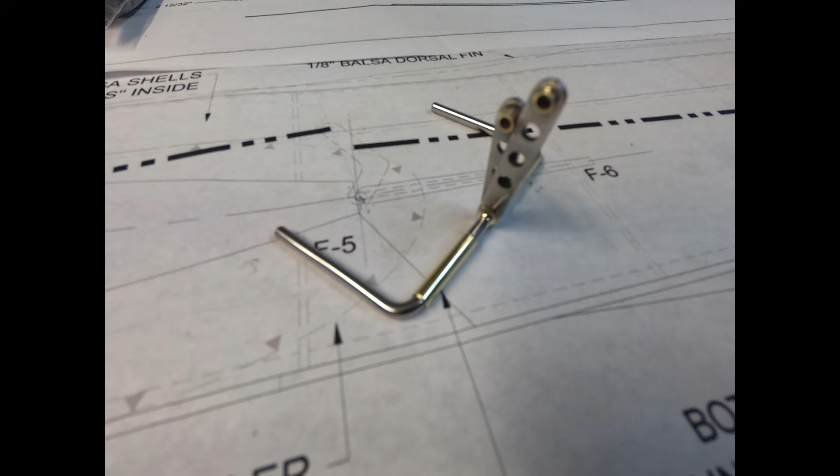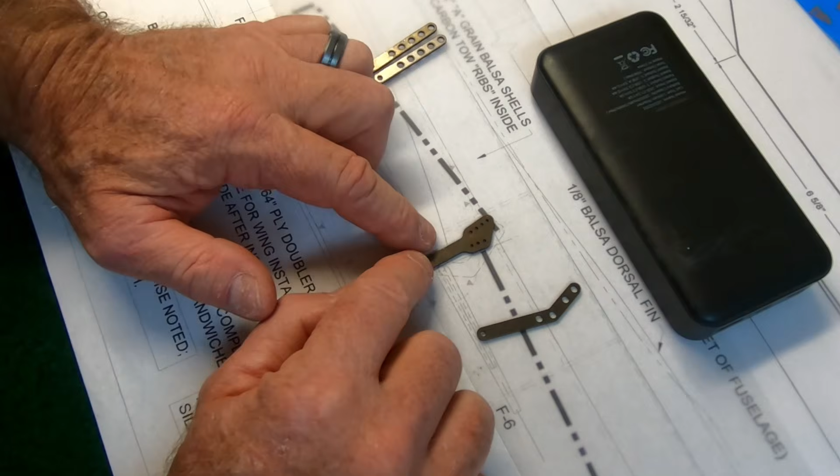So what I'm going to cover is how to custom make a horn out of two tabs if you don't have these dog-legged tabs. So the idea behind these type of horns is the offset. And what I mean by offset is the angle. So what they're trying to do in this concept, they're trying to actually keep this push rod to the axis of the flap horn

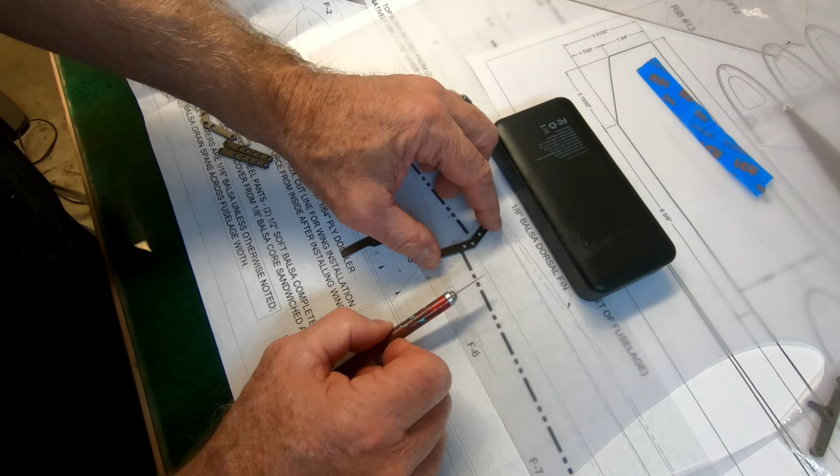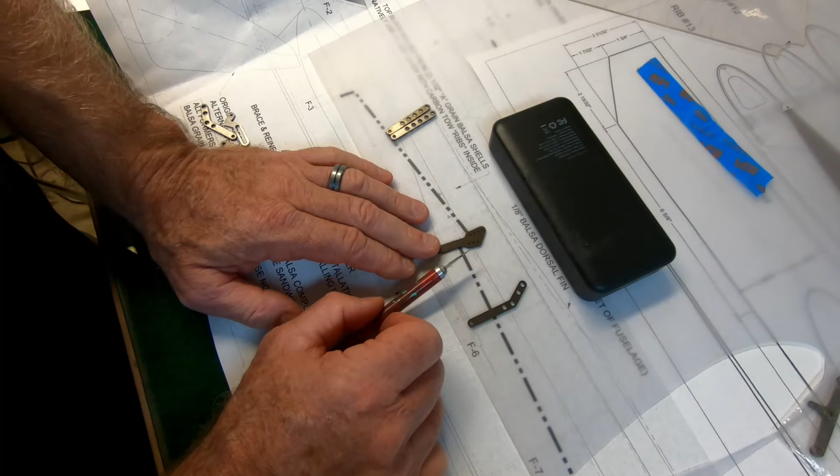vertical at 90 degrees. So if you're coming off the bell crank at this angle, you want the flap horn to angle forward like this. And then of course if you're over here going to the elevator, on some configurations you might want it to angle backwards. So all this geometry depends on your airplane. So let's just say you get into a scenario that this won't work and this won't work. So you want to custom make your own.

Bob Hunt and I talked about the G10 board horns, and those are coming. There's a couple things I got to finalize. It's not so much how to make them, it's the tooling. This is one option out of many. There's not one solution, there's many. So this is just an option.

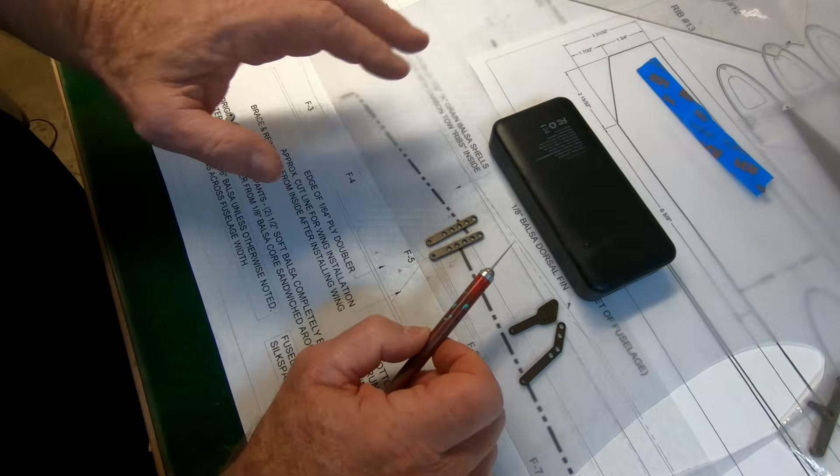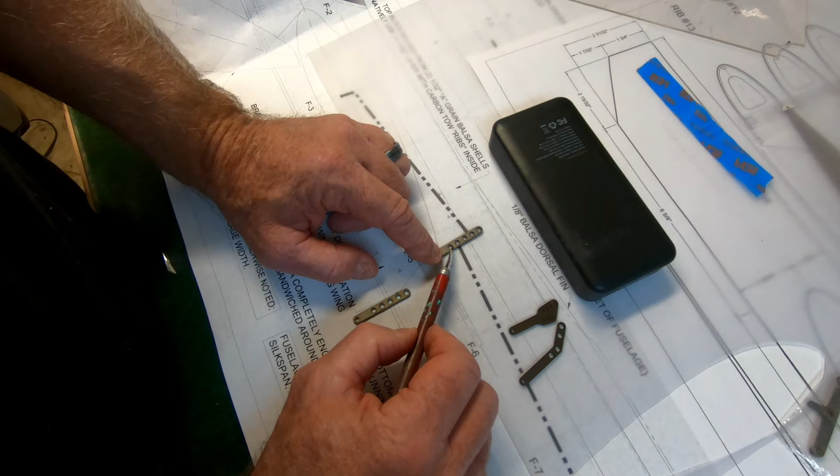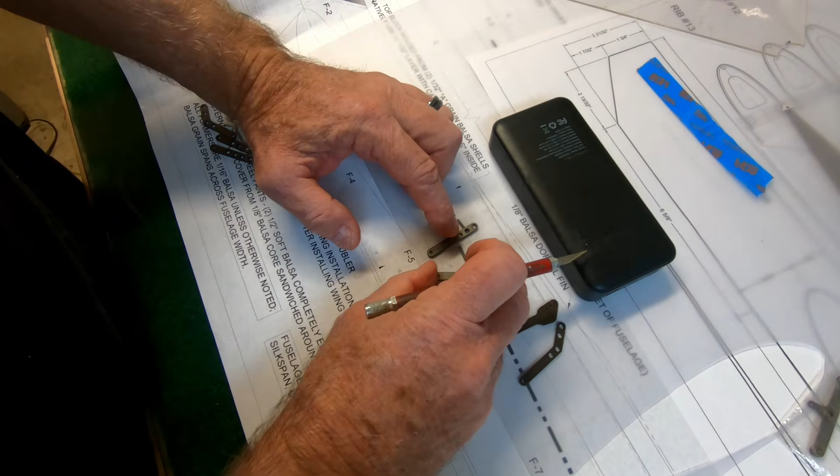But in order to go with this option I'm about ready to show you, you got to be able to braze. And then there's other videos where I showed you how to accurately drill holes, within 1/1000th of an inch, and I'll refer to those, or I'll put a link in the description on this video. So the concept is this one needs to lean forward and this part here needs to lean back.

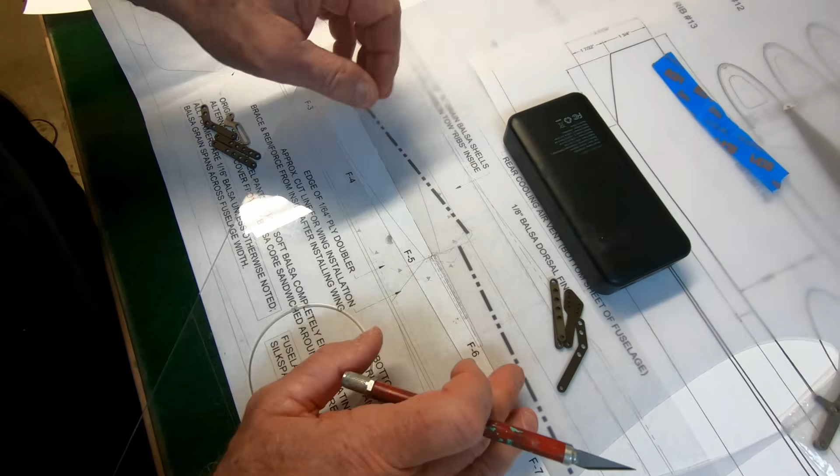Okay, so in order to get there, what I first need to do is line this edge up here with the center line of the wing and the flap. And if it's not already straight on your C-temp, cut a straight edge in your C-temp. What I like to do on a square, and these come in handy for a lot of different things, I'll take another carpenter square and I'll scribe a line right here into the plexiglass.

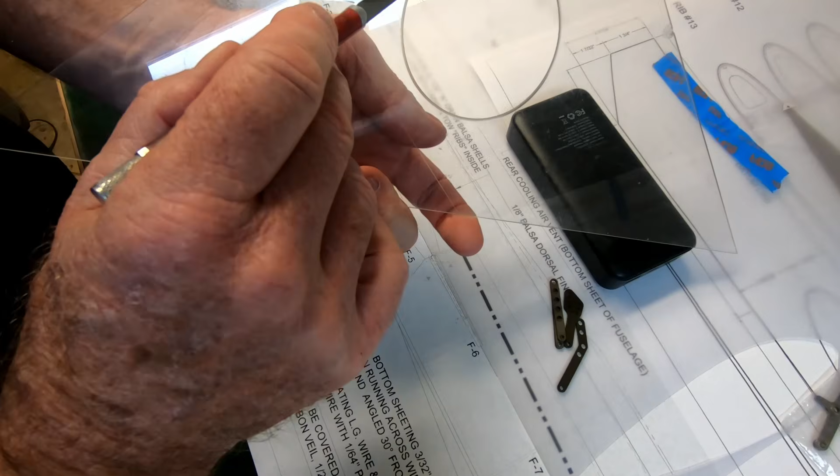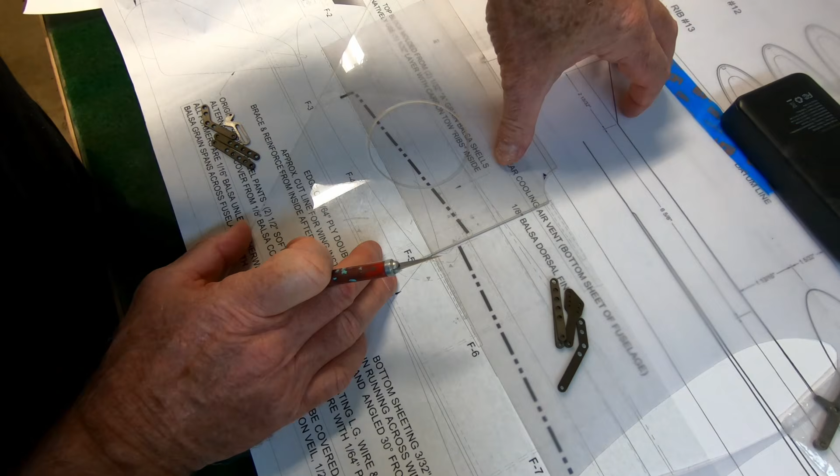And what that allows me to do is lay the plexiglass over the plans like such, and then scribe a 90-degree line to it, or mark it. So what I need to do in this case, I need to mark off 90 degrees to this push rod. So this is my fulcrum point right here,

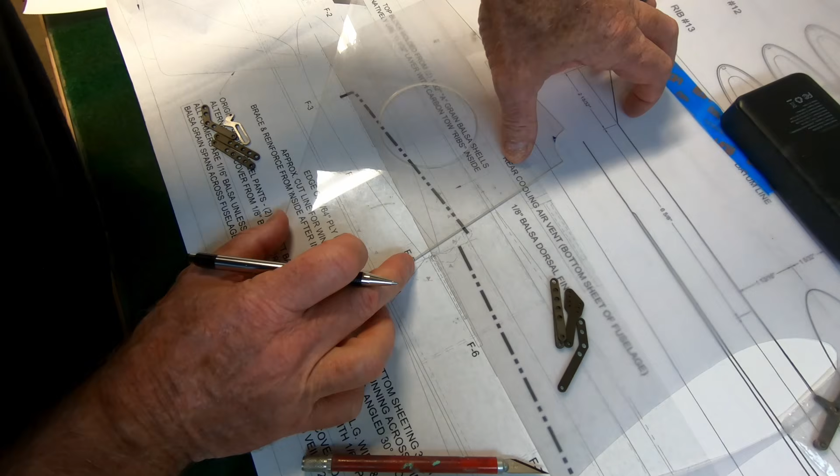and I'll take this scribe line in the plexiglass and I'll line it up to the push rod just like that. So now I know from the push rod coming off the bell crank to the first flap horn, this is the angle I want for 90 degrees. Now if you want anything other than 90, obviously you got to get a protractor in there.

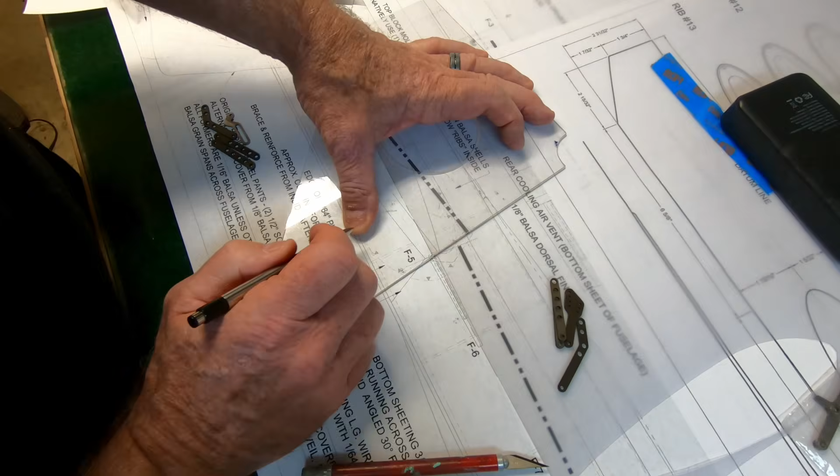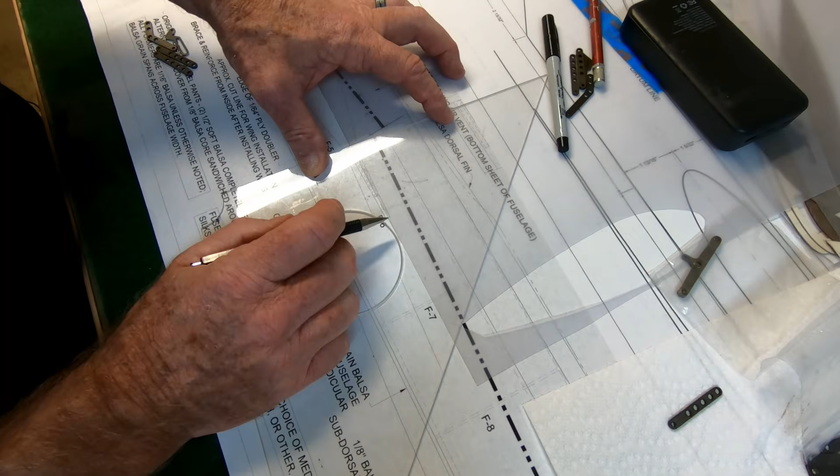So now the next step is to go from the fulcrum point here, and I'll come over here to where this push rod is, and I'm going to flip this over here, and I want 90 degrees from here. Anytime you make an adjustment at your elevator horn back there, it's going to throw this off. But I'm not going to get into the geometry.

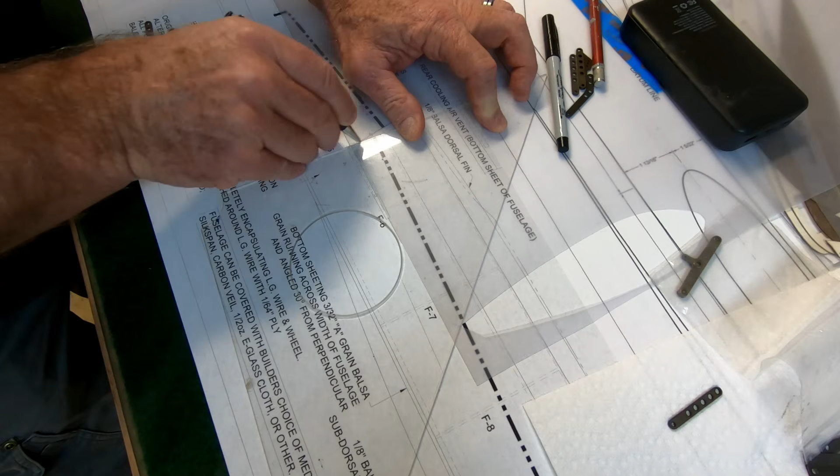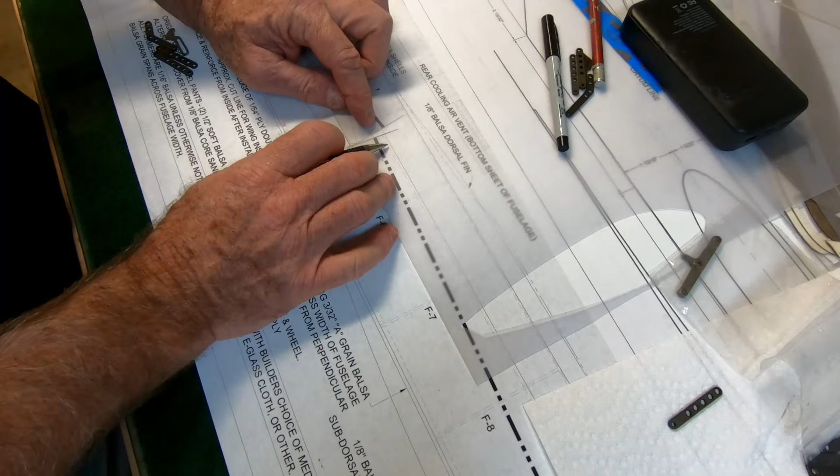There's been so many people come up with some good stuff. It's on Stunt Hanger. Howard Rush put out a video, and Sparky made a standalone video of the program that he came up with to get this geometry. So I'll leave that to the experts. But all I'm trying to do here is show you how to actually make a horn with geometry that's unconventional.

So this is what I need. So you got to remember, right here is, let's just call it the datum line. We'll come off and we're going to braze this horn to your wire at this angle. We're going to braze this horn at this angle. This C-temp is going to be the template to accomplish that.

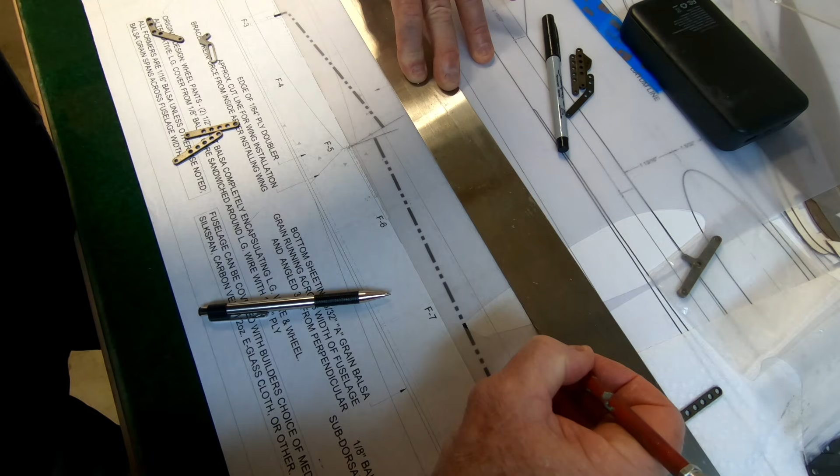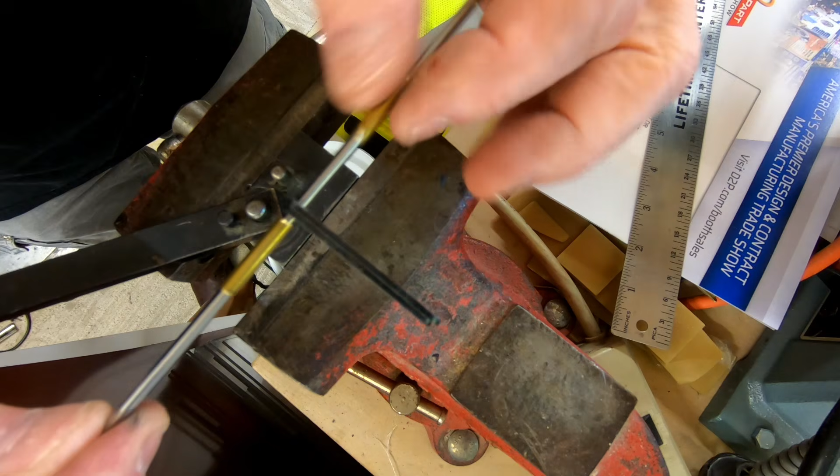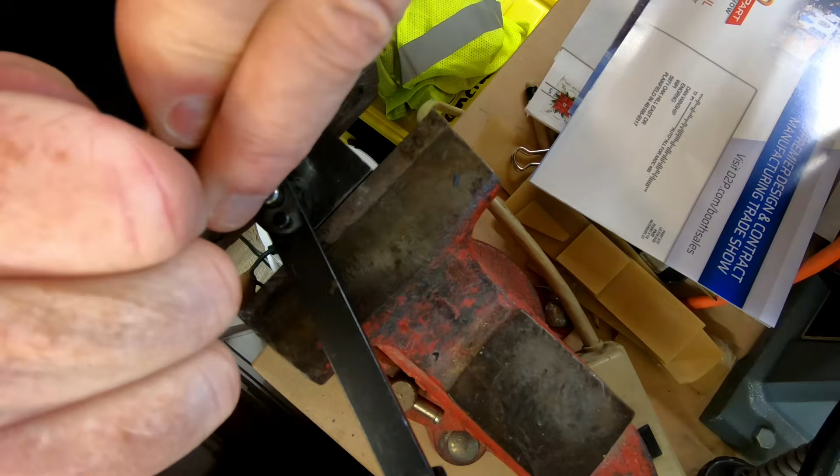And I overshoot it a little bit, and then I spring it back to get the 90. The tricky part, without a jig, is to figure out how much creep is going to come into this, because as you bend this wire around the post, it's going to want to pull this way. It doesn't have to be perfect, but try to get this parallel on the same plane as your bend.

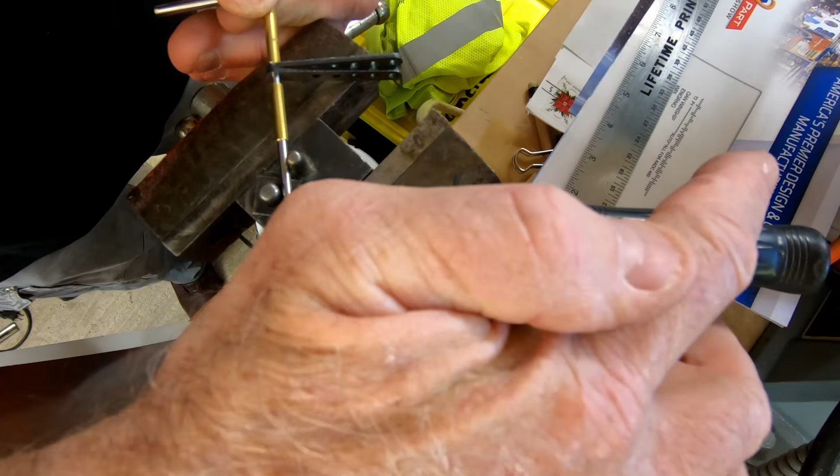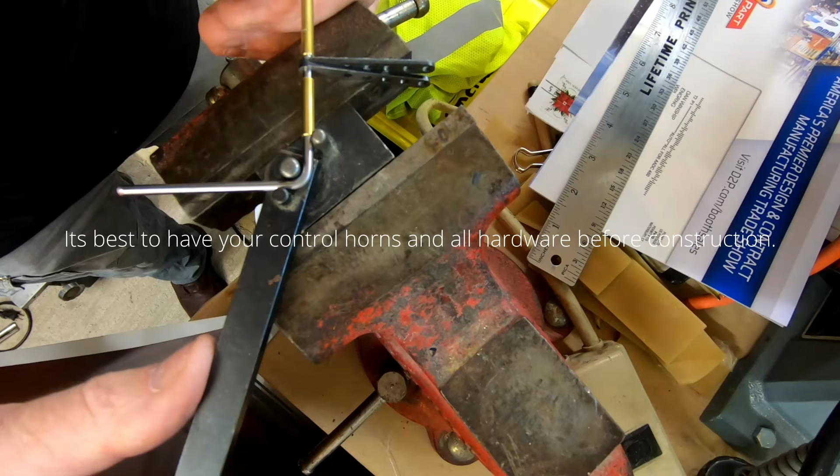Let's tighten this foot vise down a little loose. Let's pull it around here. Now, being drill rod, I get a little tweakability with this wire. You go on the outside diameter, it's 2 3/4, so that's what I wanted. I guess we're looking at a 1/8 inch creep.

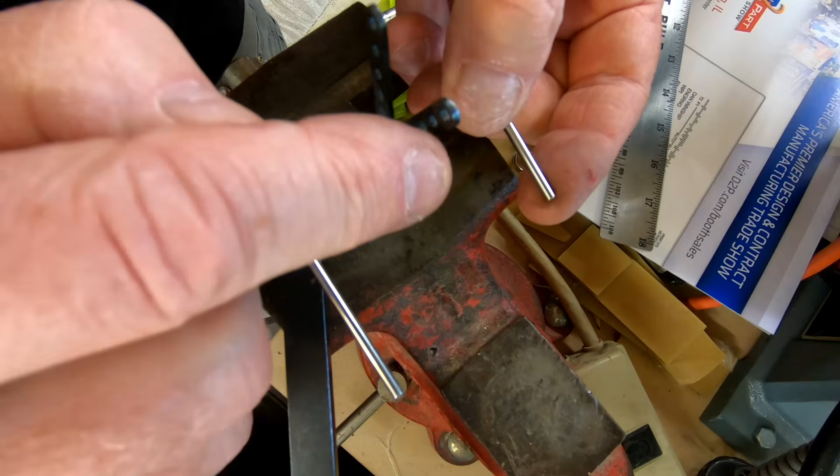And then what we're going to do next is put this in a fixture, and we're going to take the template we made to get the right angle on this flap horn. It's clamped between these two plates. There's a magnet here that holds these 1/8 inch rods, and sliding these rods back and forth on top of the magnet allows me to get the angle I need. And I can just get a visual right here to see if it's the right angle.

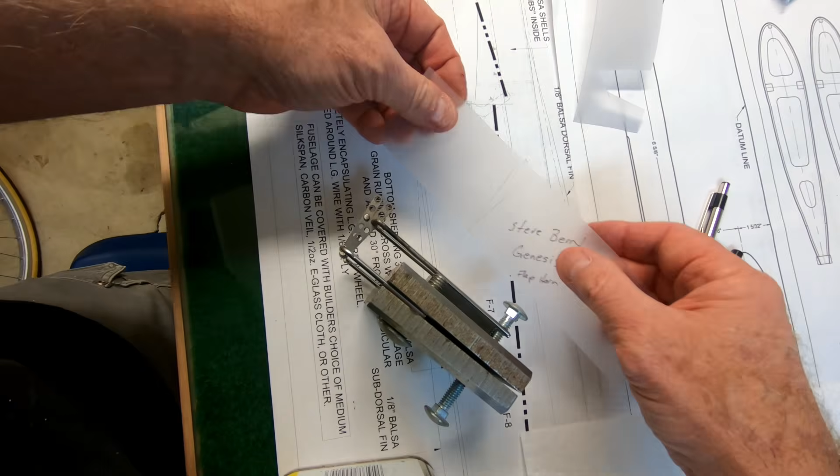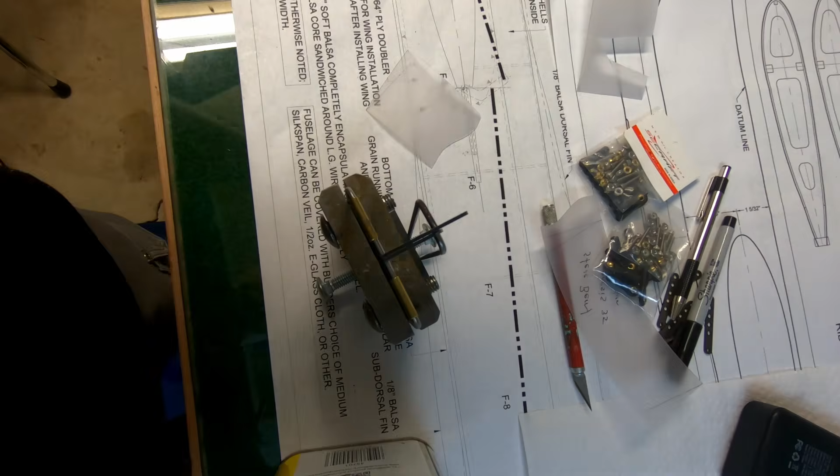I also put these angles on the template, so I can slide this back and forth and eyeball it. So I changed this template a little bit, cut it shorter, moved the magnet back, and I've got this cut here for the angle for the front horn. So pull this back a little bit, get the right angle. Measure it this way to make sure it's centered.

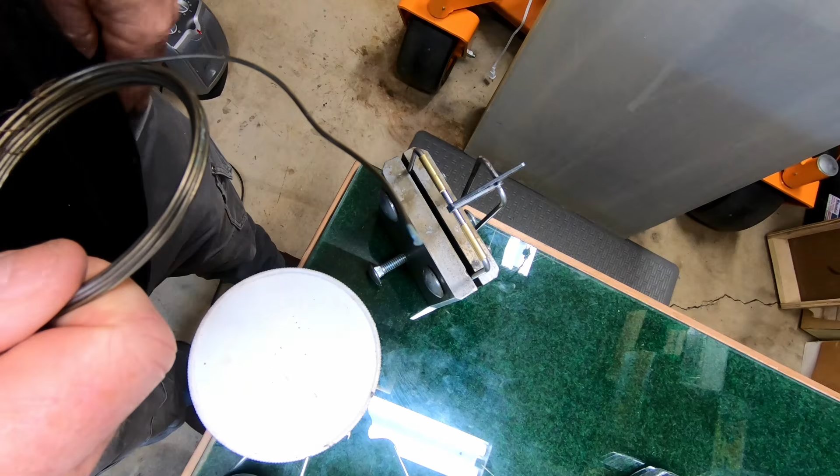Now these have been cleaned, the drill rod's been cleaned, and the horn tabs, the upright, have been cleaned. I always like to take this 45% silver braze, and I'll go through there and cut this tip off. You can see where it's a little corroded. I'll go in there and nip that off. Try to start with a clean rod there.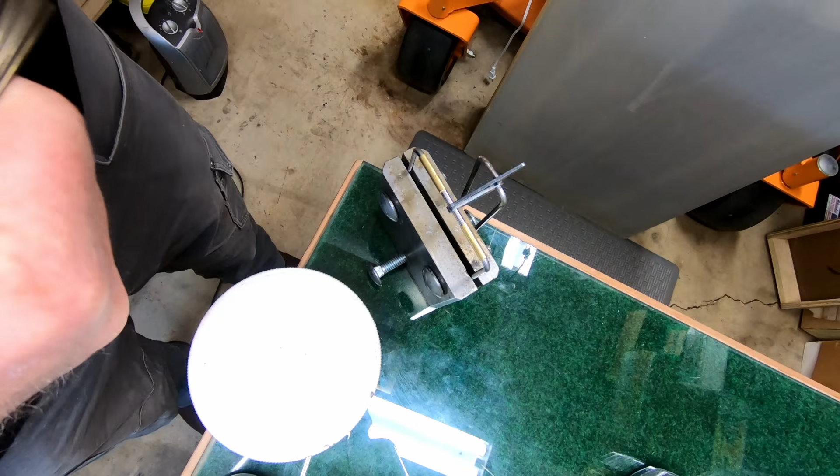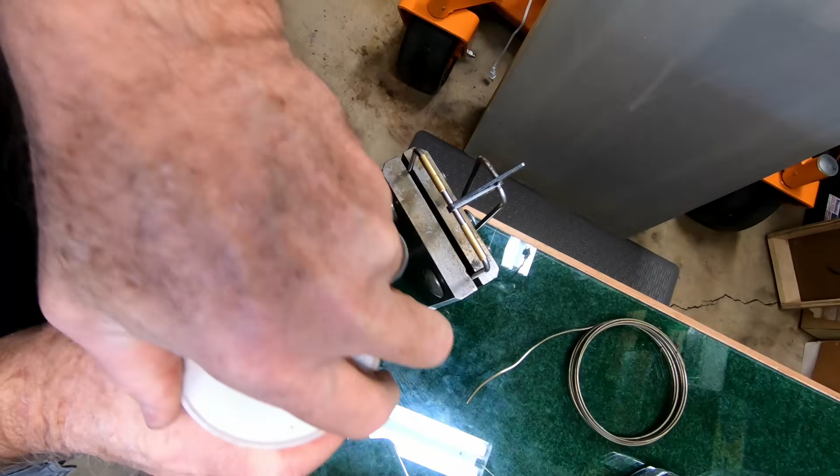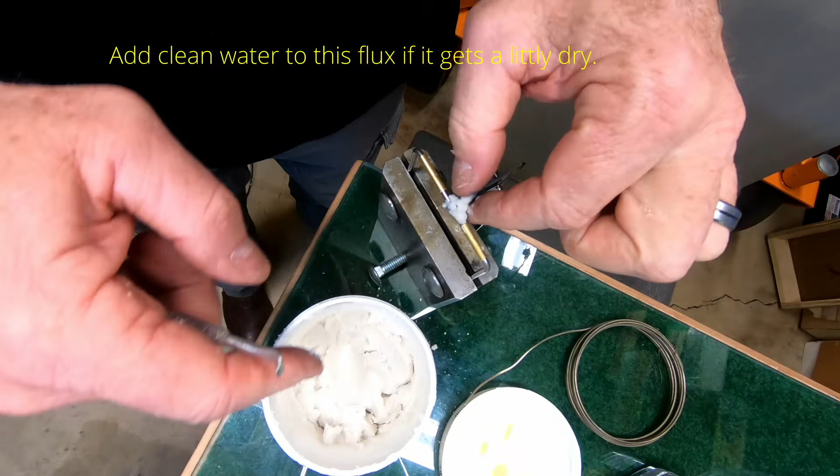I always like to take some Scotch-Brite, clean any of the tarnish off of it. Try to keep it as clean as possible. And this is getting a little crusty, but I think it's still okay. Now what I like to do is load this up with a lot of flux. By putting a lot of flux on this, it allows me to clean it up a little bit easier. This is what I use, just propane.

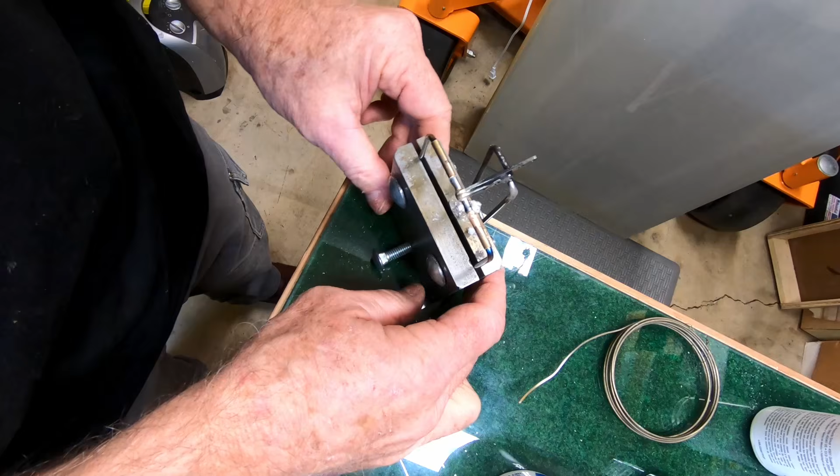That's all there is to it. It's a pretty quick process. I like this fixture. This whole fixture was an accident, it was scrap. But I like it because you can actually turn the horn different ways. It's heavy enough that the horn is stable. I'm able to do a lot of clamping with the uprights. But it's nice if I ever want to braze at this angle. So it gives me the flexibility to rotate the horn.

So it might be worthwhile to find a machine shop with some scrap, some bar stock like this. There's another place called Metal Supermarkets. You can go in there and they'll actually cut you any size you want off of bar stock.

So I've got K&S 3/32 ID brass in here, and I'm going to braze it with 45% silver Harris. This is probably 1/32. It's a really fine wire. It's the same alloy as what I just used on the horn, just smaller diameter, and works out good for these little bushings.

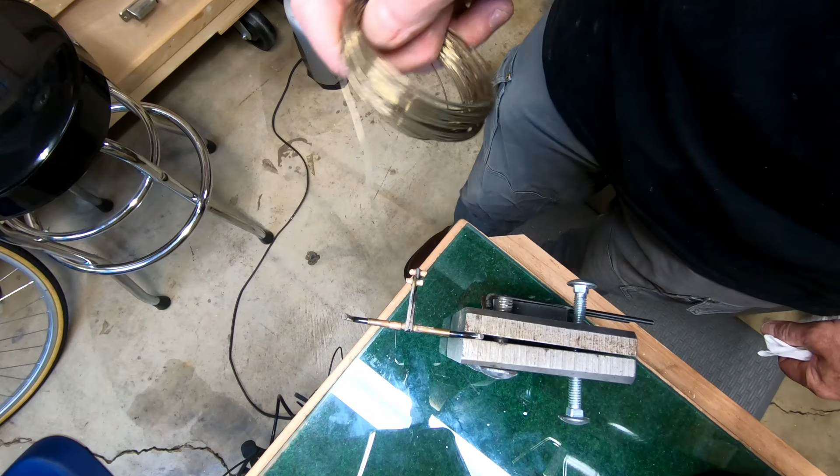So same as before, you just let it cool. You don't want to get this so hot that you mess up this braze. And that's what's nice about this small wire. It seems like it melts a little bit quicker, not as much heat.